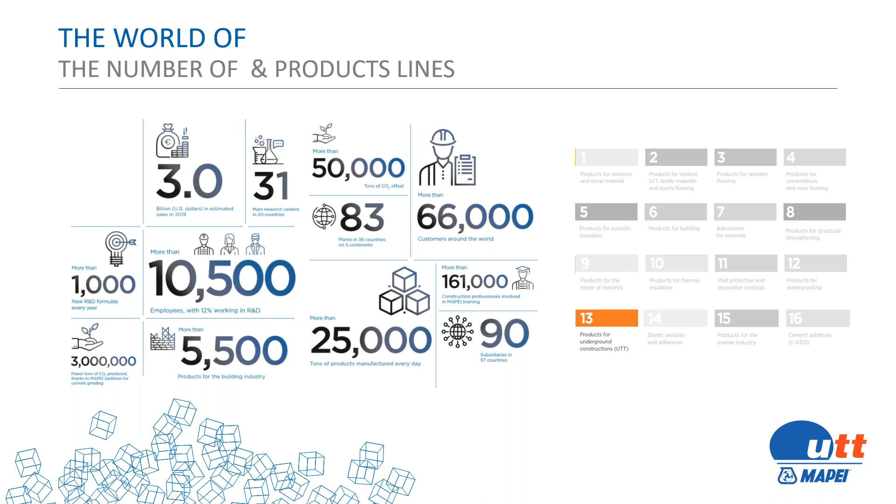This is why in Mapei we're going to find we have working through different segments. Today we are with UTT. So UTT, it's a team responsible about underground structure product. Our area of focus is tunneling, underground construction, and mining. And we serve our customer in different product groups.

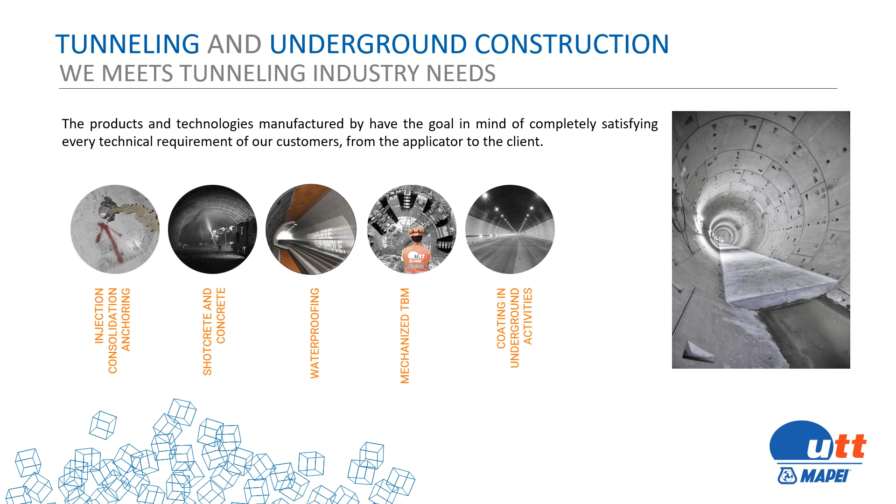So we have a very great solution on injection and soil injection as well, shotcrete, waterproofing, TBM product, coating and protection, and also rehabilitation. When we talk about spray concrete or shotcrete, we can provide admixture, accelerator, additive to improve the concrete. Also, we have TBM products like soil conditioning, grouting, sealant.

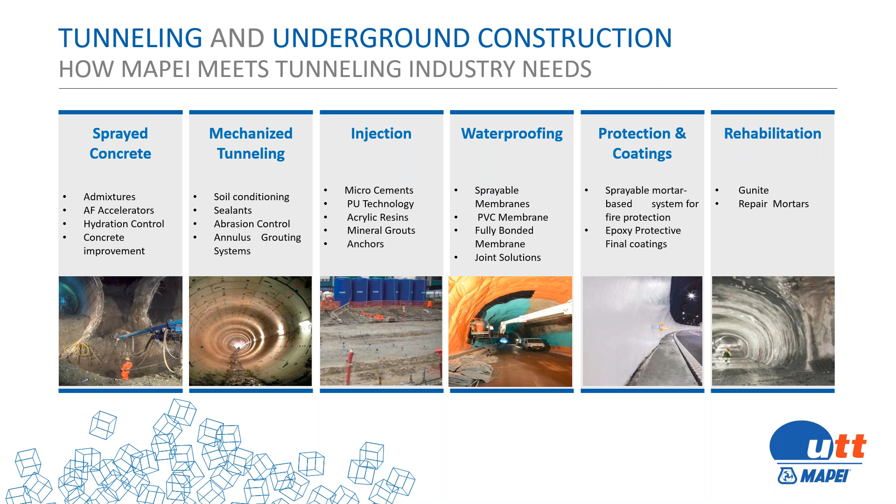In injection, we have different types of injection technology as we're going to see today. So we have microfine cement, PU technology, acrylic, silicate. Waterproofing, we also have different types of solutions, protection and coating and rehabilitation. Mapei, we provide our customer with innovation, technical support. We have a great experienced team and fantastic logistics and supply.

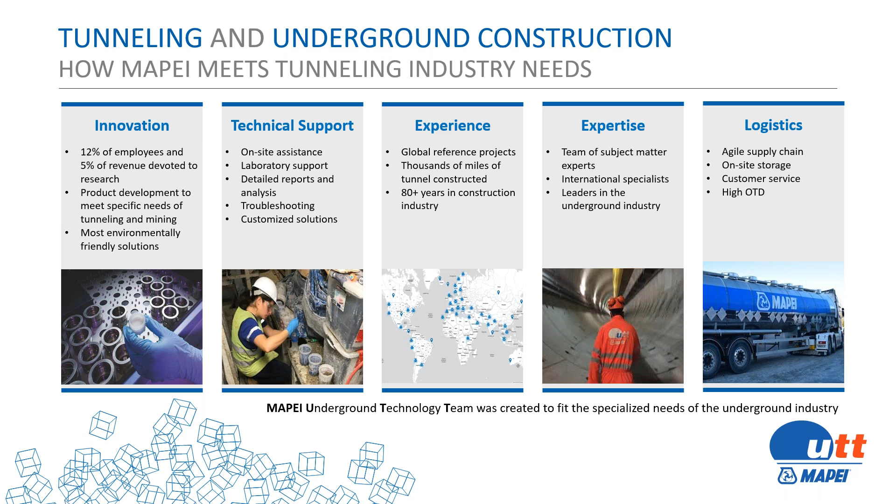Before we start with waterproofing, I would like to give a very quick introduction about our team here in North America. So in front of you, you will find different types of experts in different fields, supporting with a worldwide support team from Mapei UTT, and also we have our administrative team giving us very, very great support.

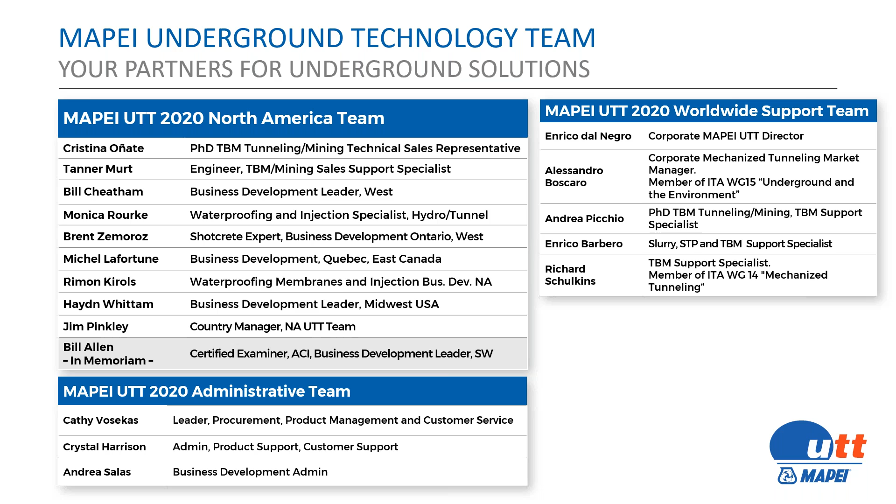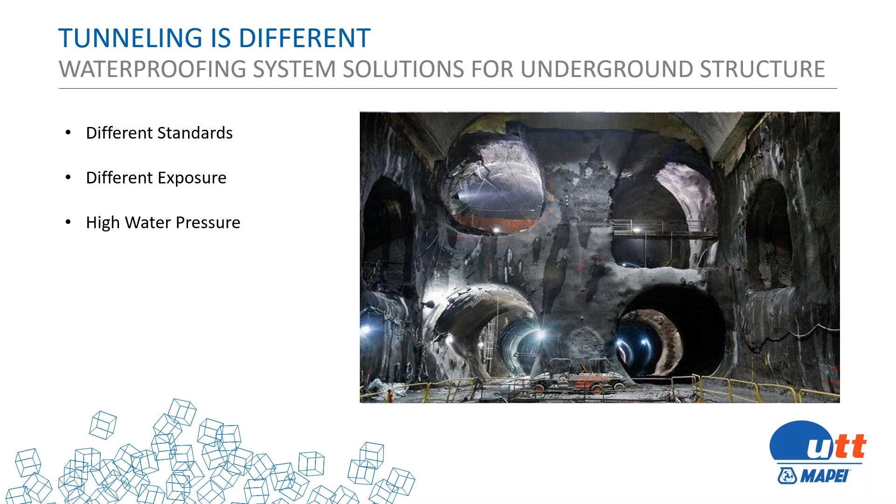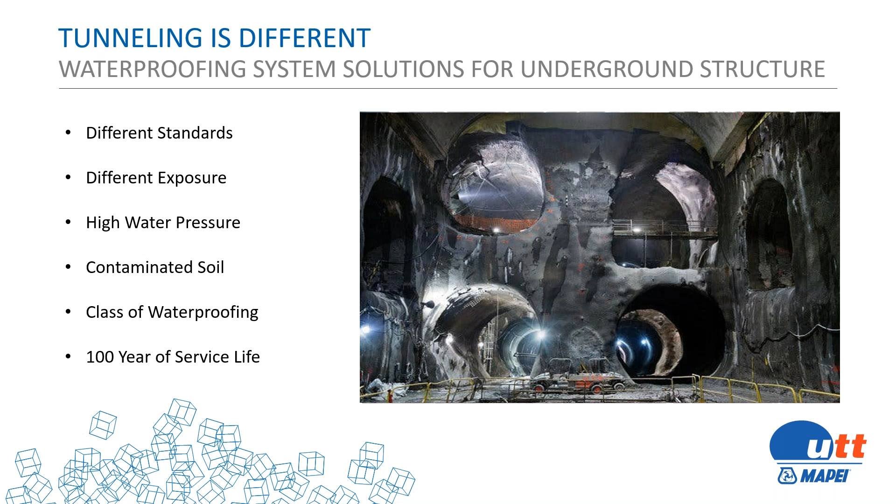This is why tunneling needs a different standard. So we speak about different standards comparing with residential and commercial. Also in tunneling life, we have different types of exposure and different types of force we need to handle. Most tunnel projects are subject to very, very high water pressure. Soil is contaminated with sulfate and chloride. The owner of waterproofing needs a very, very high class of waterproofing. And also the owner has a very, very specific requirement about 100-year service life. So he's asking for a waterproofing material that can have a life of 100 years of service life. This is why, as you can see, we have different challenges when it comes to waterproofing.

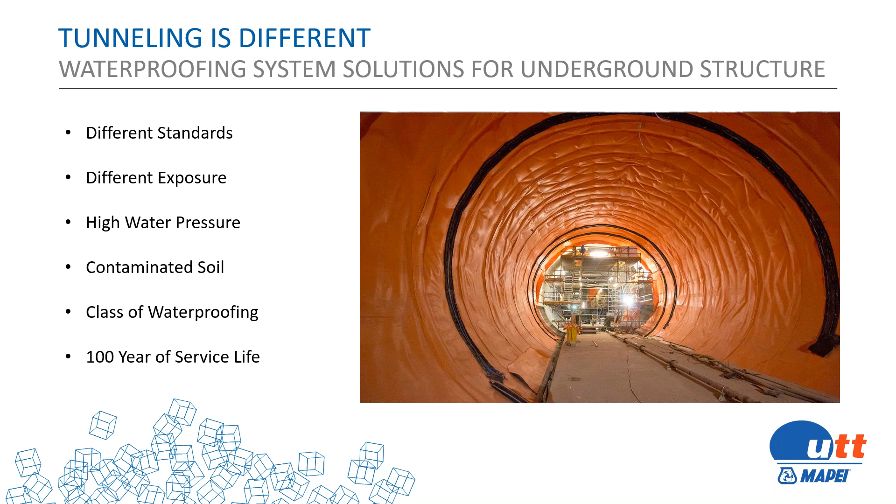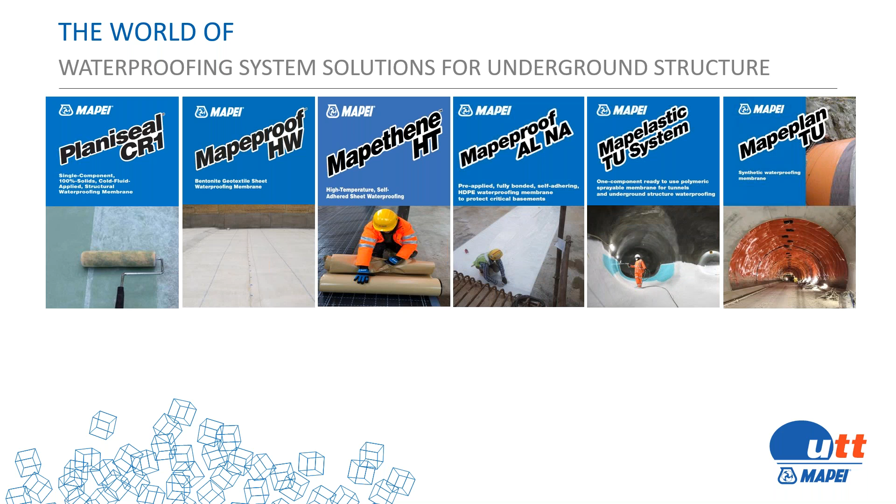In Mapei, we have different types of solutions when it comes to waterproofing. We have the Planiseal CR1, a single component cold fluid applied membrane. We have the Mapeproof HW bentonite waterproofing membrane. We have Mapethene HT, the peel and stick fully bonded membrane. We have Mapeproof AL NA pre-applied fully bonded membrane. And also we have Mapelastic TU system and Mapeplan TU.

Underground or deep underground structures in tunneling are different from residential and commercial construction. So most of the time in tunneling, we focus on the last two systems, either Mapelastic TU system or Mapeplan TU. Today we're going to cover a quick overview of these two systems, starting with Mapelastic TU system.

Mapelastic is a one component, ready to use, polymeric sprayable membrane especially designed for tunnel and underground structural waterproofing. The membrane will be fully bonded from both sides. First we have the shotcrete surface, we spray the membrane over the shotcrete, and then we have the final lining.

The membrane will be bonded to both the shotcrete substrate and the final lining concrete. The material comes in double color, white and green, which helps the applicator control the consumption of application. It also has a very high bond strength of 1 megapascal. It's a highly flexible material with crack bridging capability, high resistance to water pressure, and very good fire resistance.

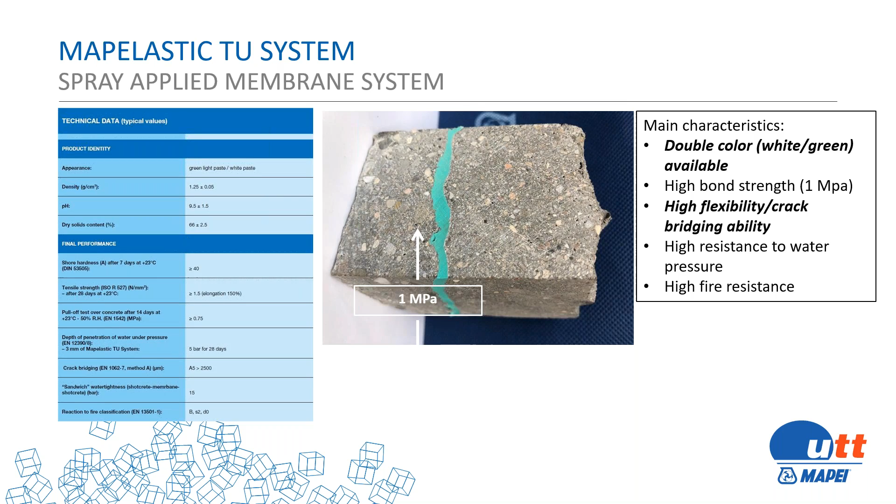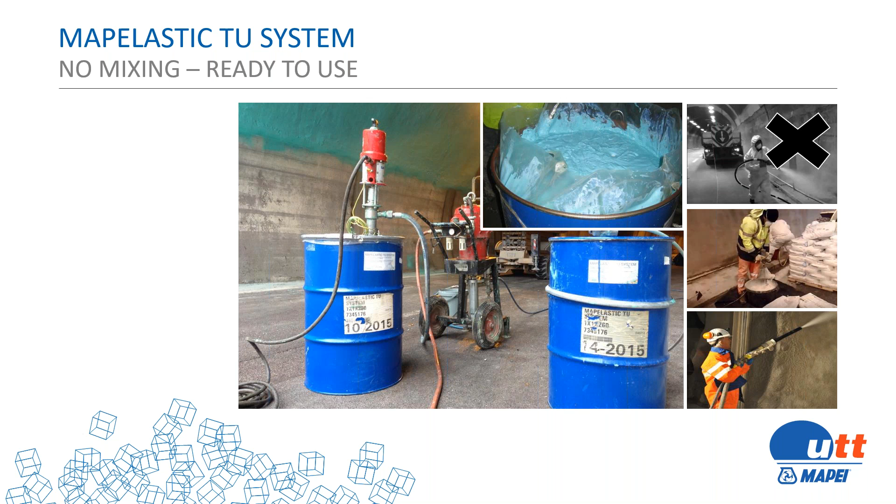Our system has a lot of advantages. First of all, no mixing - it's a ready-to-use product. Material goes to the site, we connect to the pump, and we start spraying. So there's no mixing, avoiding any type of mixing mistake. It's light and uses user-friendly equipment, so we don't need very heavy equipment inside the tunnel. It's very easy to handle.

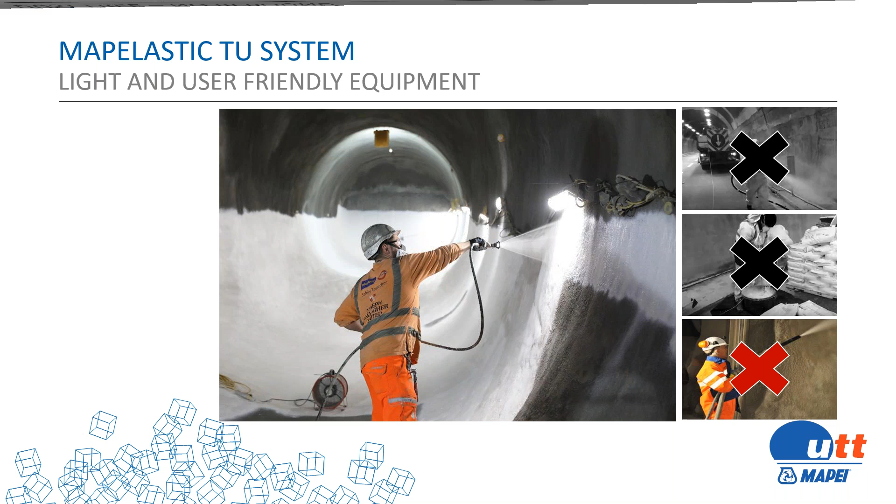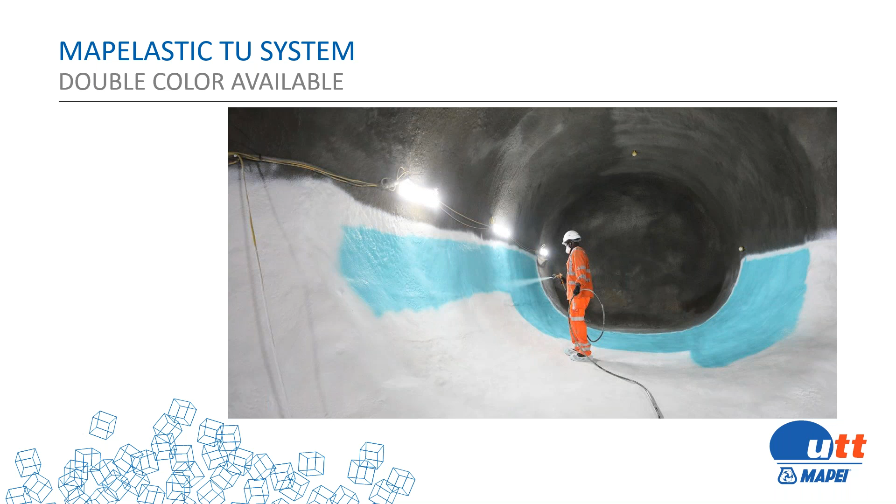And also no rebound - material is very easy to apply. The most important thing, especially when it comes to consumption, is the double color material. So as we can see, we spray first the white color, and now we're starting with the green color.

Surface preparation, when we speak about spray applied membrane, is a very important parameter. There are many different ways to handle and manage water infiltration inside the tunnel to reach a very good substrate before we start applying the sprayable membrane. To reach this good substrate, we first need to handle any type of water infiltration. We can use a drainage board before shotcreting, and once we have shotcrete, we have a good surface so we can spray the membrane.

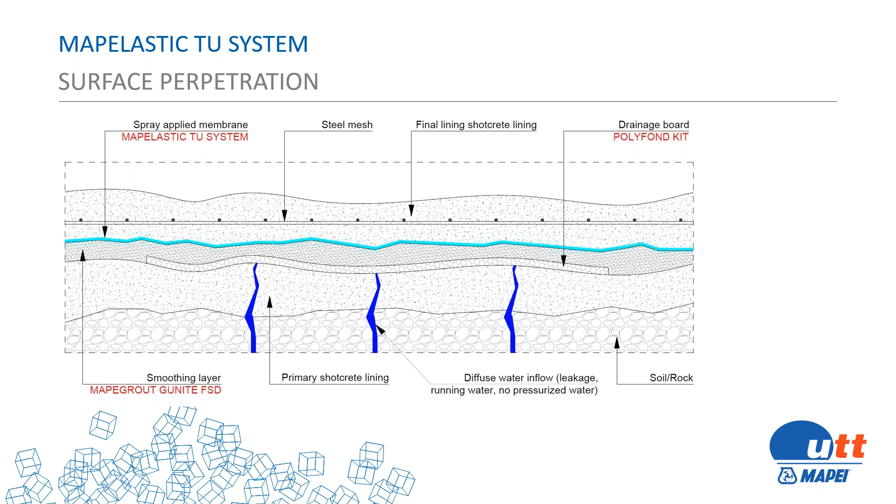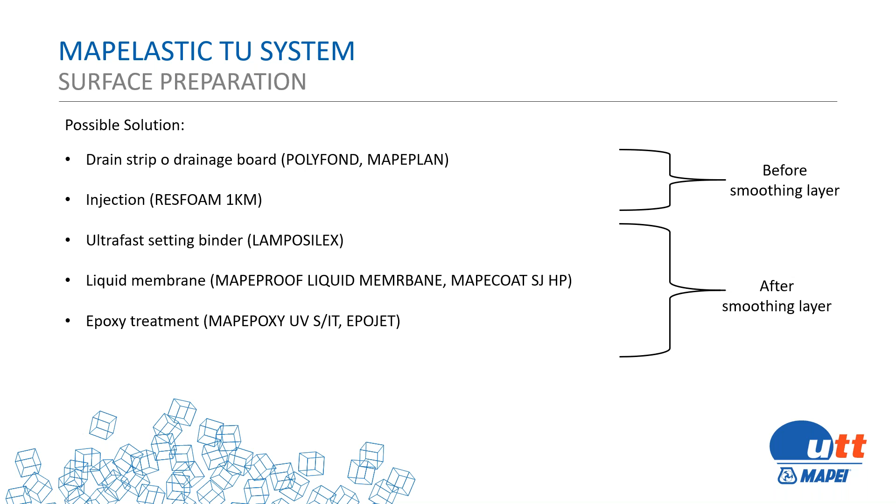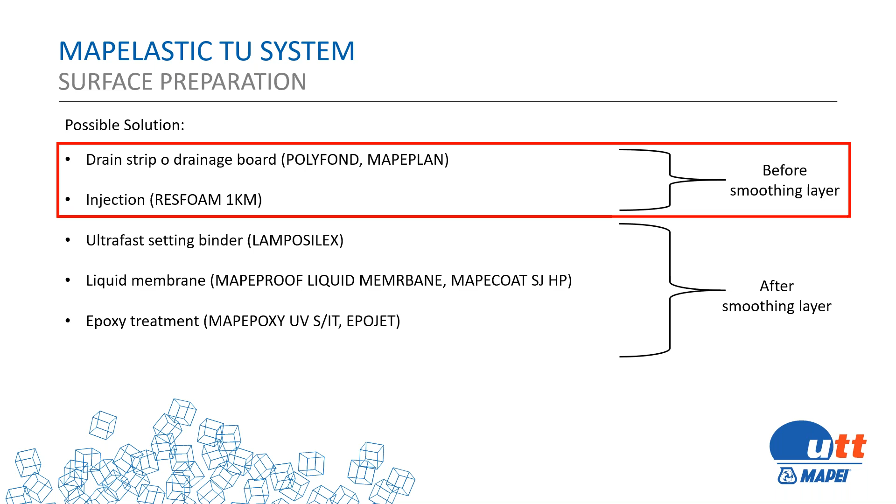At Mapei, we have a different way of reaching this type of substrate preparation. We divide it into two groups: first, before the smoothing layer or before shotcrete, we can use a drainage strip, drainage board, or injection. Or if shotcrete is done and we start to see water coming through, we have a different method and solution using epoxy treatment, liquid applied membrane, or ultra fast setting binder to solve this issue.

The second system we're going to cover today, we call Mapeplan TU S WL. It is a synthetic waterproofing membrane, usually used for tunnel and underground deep structures.

PVC membrane is one of the most famous waterproofing systems when it comes to tunnels. What makes PVC famous is that it has a lot of very good characteristics, like high mechanical resistance, high resistance to permanent water pressure, high resistance to root action, high flexibility at low temperature, high resistance to stray current, explosion resistance, and high resistance to aging. Besides these important characteristics, PVC membrane has high durability.

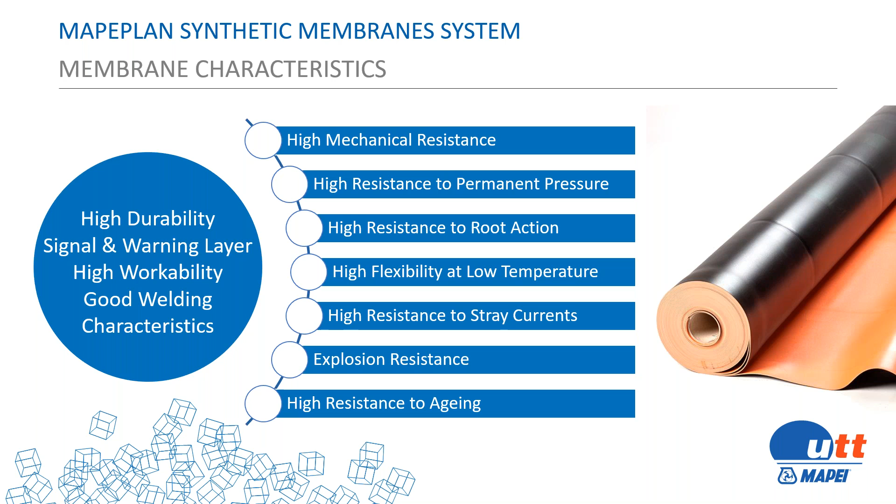As we can see, the membrane comes in twin color, with what is called a signal and warning layer. It has high workability, good weldability, and as we'll see later, we can have full quality control before pouring the concrete.

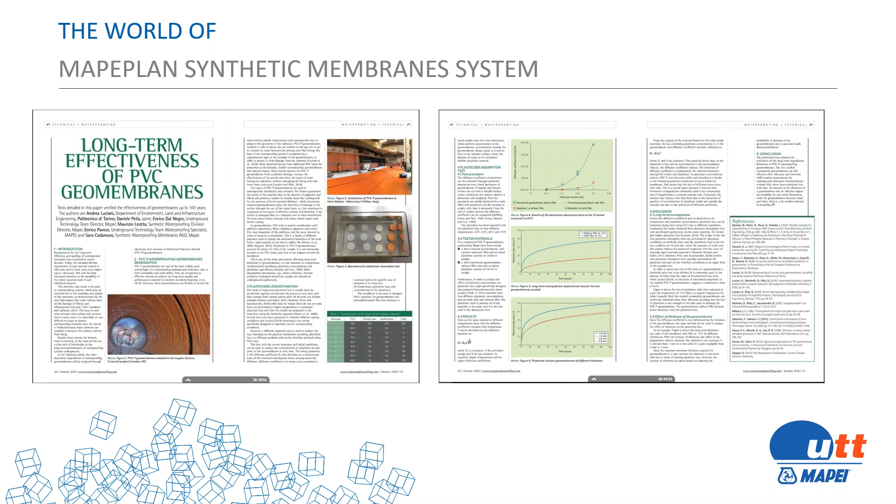We did different types of tests to confirm the long-term effectiveness of PVC membrane, and this is available. So we have our system approved for 100 years of service life, as required by owners.

As I mentioned, we have two versions of the membrane. We have a membrane with what is called the signal layer - the orange color layer - which is 0.4 mm nominal thickness. And we also have a membrane with what is called the warning layer, which is a thinner signal layer meeting the German standard, less than 0.2 mm nominal thickness.

The advantage of this signal and warning layer is that after applying the membrane inside the tunnel, if any damage happens to the membrane, the signal layer or warning layer will be scratched and we'll see the black color underneath. This gives us a good indication that there's an issue needing attention or repair.

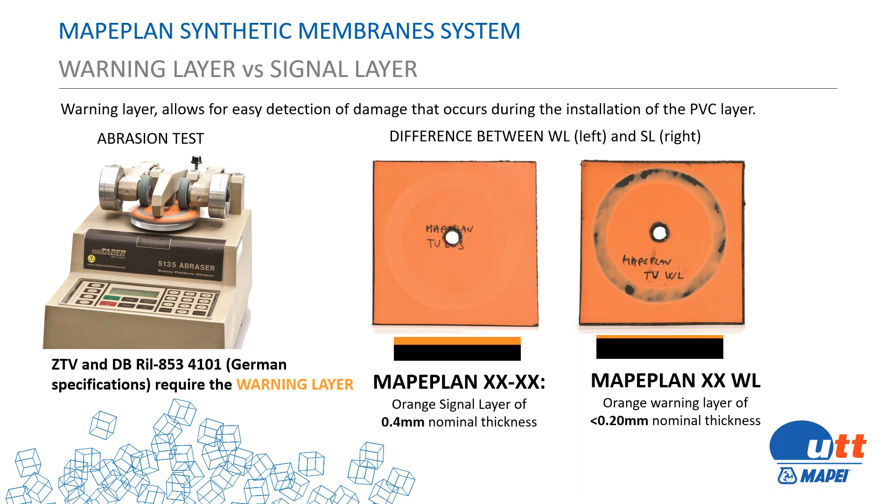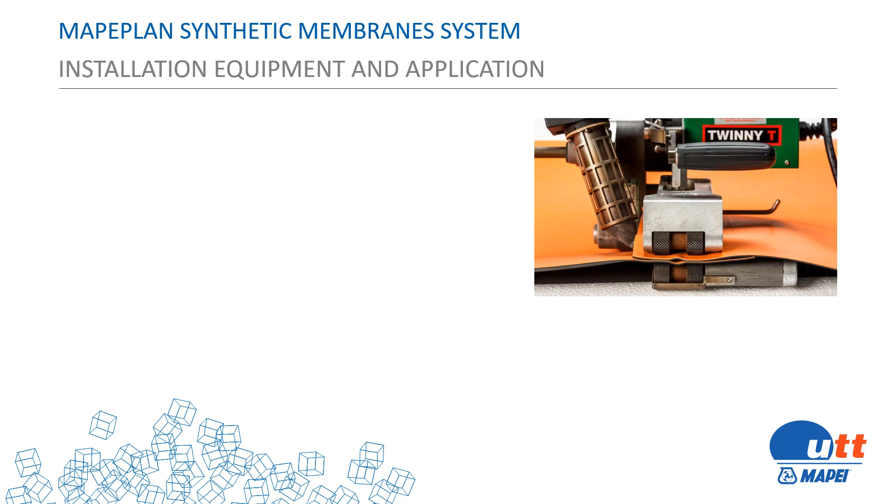As I mentioned, the most important part of the PVC system, or why it's recommended for tunnel construction, is the overlap, the welded overlap. We're using a hand welding machine to weld the overlap, or an automatic welding machine. The automatic welding machine can give us a single weld or a double weld. Most of the time, most standards ask for double welding overlap.

Double welding overlap means we have two seams, one on the right and one on the left, and in between we have an air channel, an open channel, which we use for testing purposes. After welding the overlap with the machine, we can test the joint using an air pressure test. If we close the beginning and end of the line, we will have this closed channel where we can introduce the air pressure needle.

We make a pressure of 2 bar, and then we start to monitor the gauge. If the gauge goes down, that means we have an issue with the overlap. If the gauge doesn't go down, that means we have a very, very good overlap. Again, the welded overlap is stronger than the membrane itself.

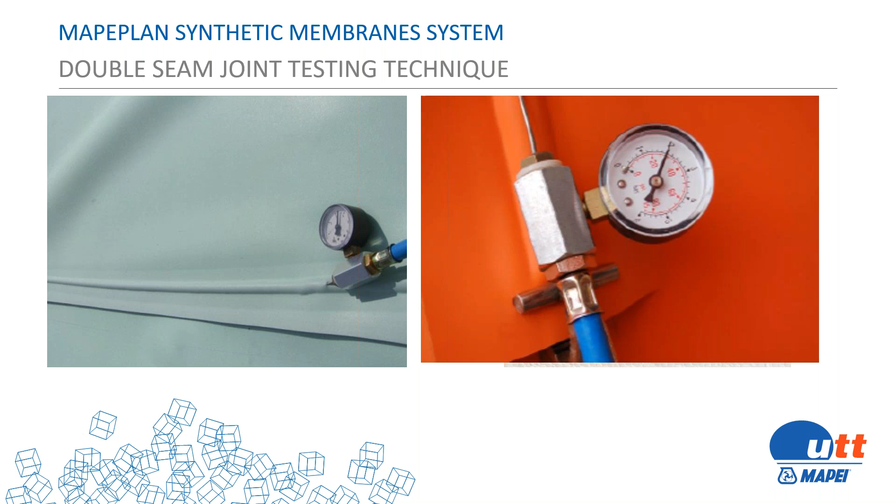As I mentioned, the beauty of the system is quality control before pouring the concrete. So after installing the waterproofing membrane, or PVC membrane, we can have full quality control before pouring the concrete, through the air pressure test, and also other methods of testing.

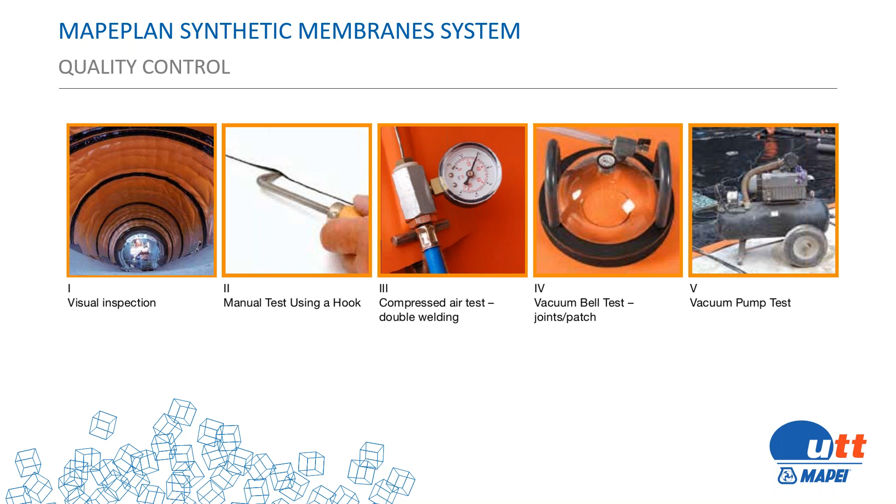As we're going to see here, we have what's called visual inspection, manual testing using a special tool or special hook. We have the compressed air test, air pressure test. We can also use a vacuum bell, or a pinhole detector test, called a spark test.

This brush will go on top of the membrane. Once we find the pinhole, we get an alert, both sound and visual, telling us we have an issue. So as we see now, we have a very, very high quality product, welded, with full quality control before pouring the concrete.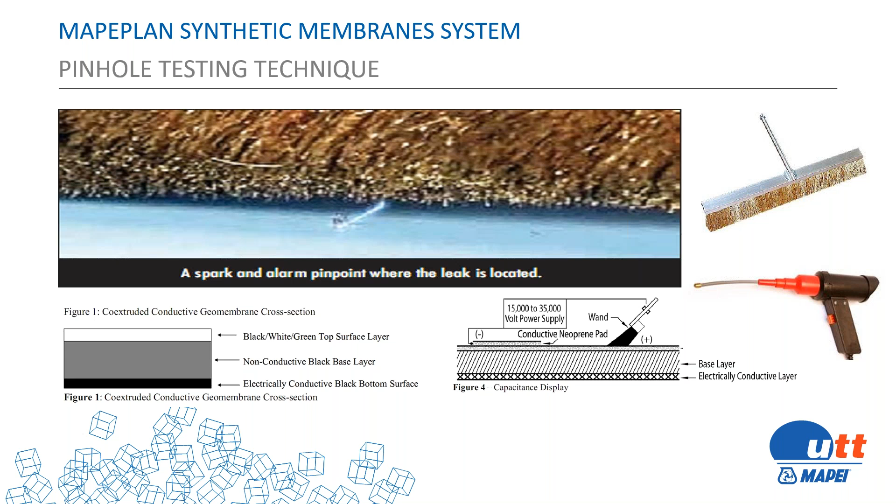Another big beauty of the system is what we call the compartment system. The PVC membrane system uses a water stop as part of the combined system. We use water stop at all construction joints and expansion joints to seal the joint, and we weld this water stop to the membrane to create what we call a compartment.

Each compartment is around 1,500 square feet of area. Every compartment will have a testing and injection flange. We use this flange for testing the waterproofing system after pouring concrete, and also in case of any damage or leakage, we can repair the system.

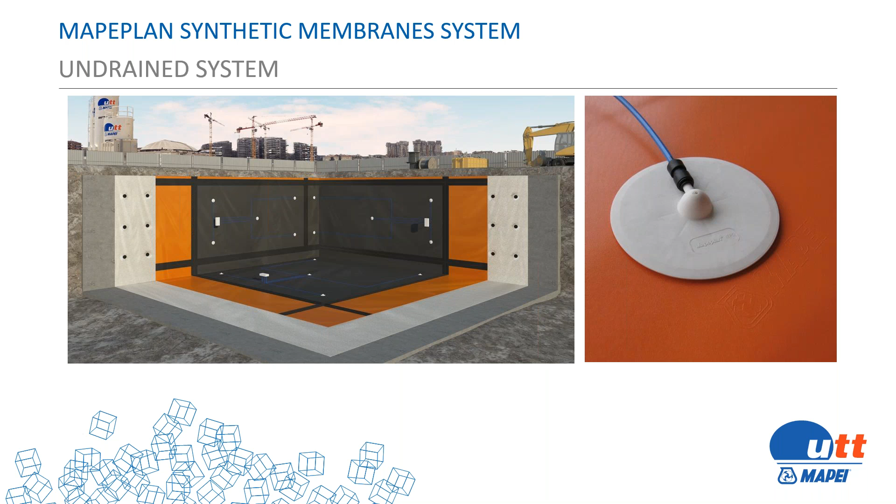As we see now, this compartment has 5 valves. This valve connects through the blue hose to a junction box. In case of any damage, water will start to show from this valve. This is why we call it a testing valve.

Very easy - once we start to see water dropping from this hose, we connect our injection pump and inject the acrylic gel material through the junction box. This way we start to fill the compartment and repair the leakage from the source. This valve gives us very good access to the source of the leakage.

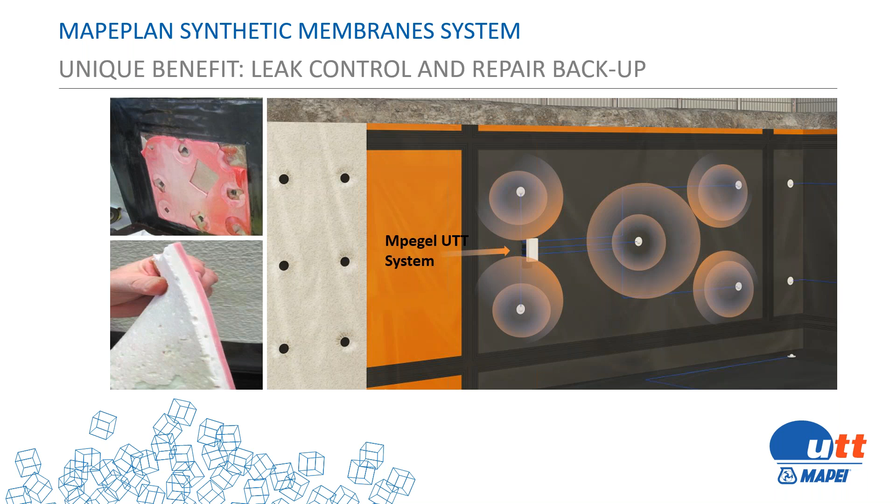At Mapei, we have a very big advantage in having both systems - the sprayable membrane and the PVC sheet membrane. This helps us a lot in many projects, because sometimes a project combines two different types of system. As Mapei, we're also able to provide a transition detail between these two systems, between the PVC system and the sprayable membrane system.

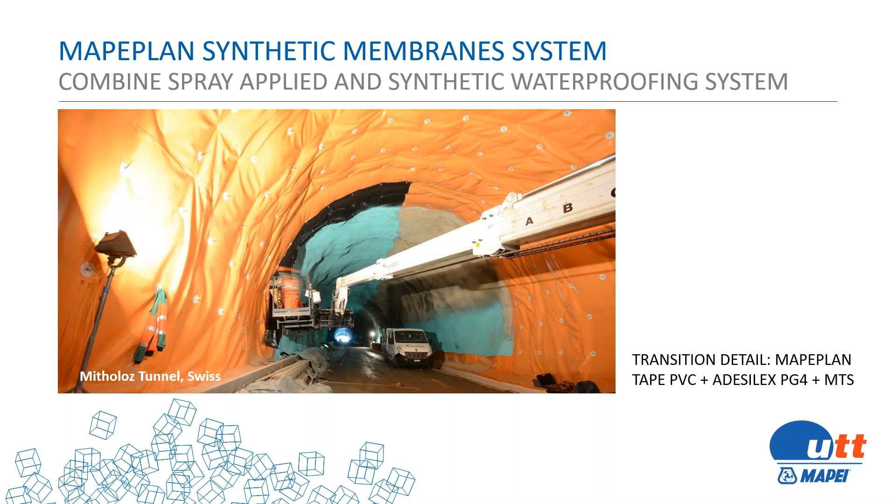In front of us now we have a very good photo from our project in Switzerland. It's a tunnel, so we can see the built-up section of the system. First of all we have the shotcrete. Above the shotcrete we start to lay the geotextile. Then we have the PVC membrane. On top of the PVC membrane, we can see the water stop welded.

This water stop is in the area where we have a construction joint, and at the same time, this water stop creates the compartment, so we can see the different compartments. We also see on the right the blue hose for the injection flange, which we use for testing and in case of any leakage. We also see that the water stop is backed up with an injection hose solution.

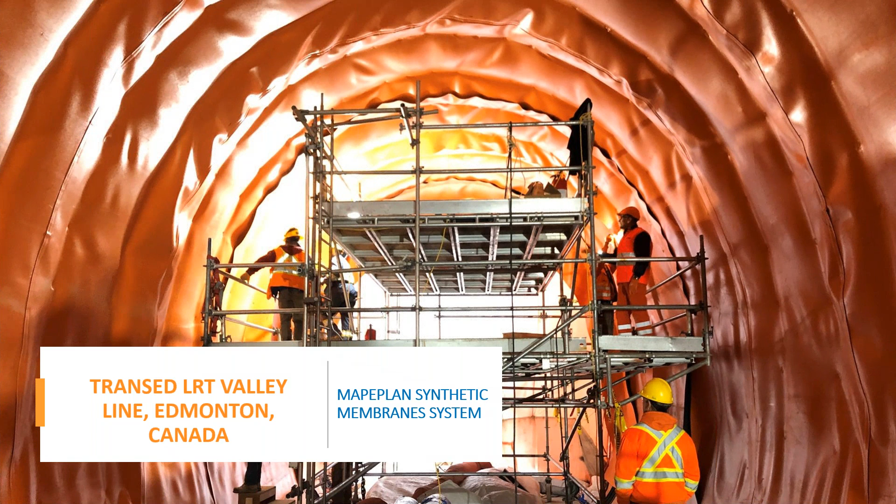In this same project, here's another photo showing people applying membrane to the arch of the tunnel. We start by fixing the membrane using a fixing disc to the substrate. We see the overlap, and also people start testing this overlap using an air pressure test.

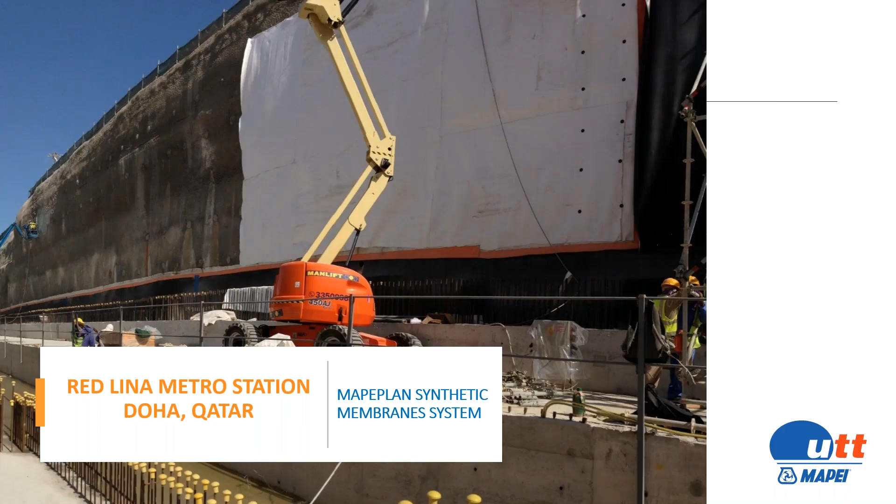Another station example. Here the applicator is easily installing the PVC membrane on the shotcrete surface. After installing the membrane, they start welding the water stop to the membrane for creating the compartment.

PVC membrane is also used a lot in cut and cover tunnels. So if we have a tunnel starting as a mining tunnel, and then we have a part that is cut and cover, the PVC membrane has a very good advantage: it can be pre-applied or post-applied. So even if the construction is already done and we have concrete, we can post-apply the membrane over the concrete surface.

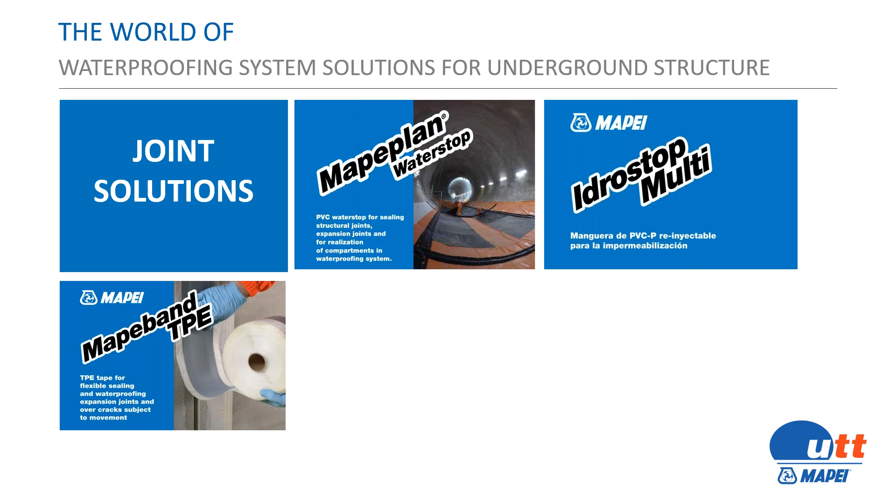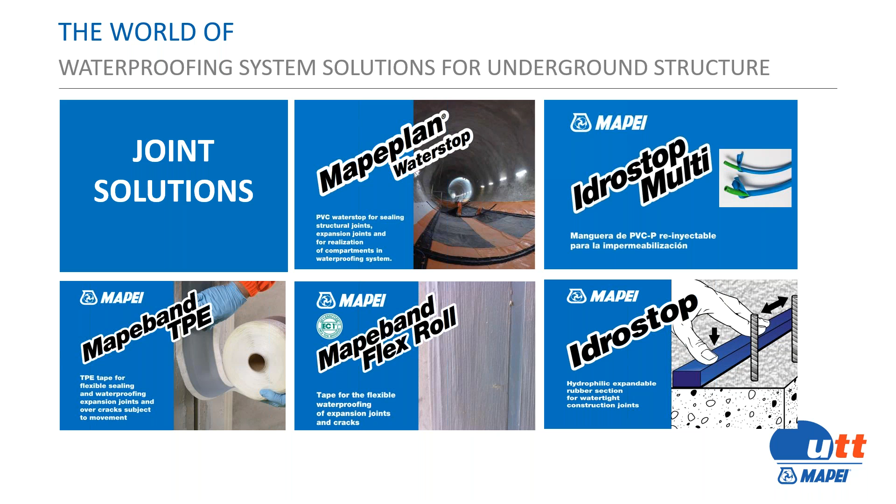Mapei supplies not only waterproofing, but as I mentioned, it is a full system. So we supply all joint solutions available. The system includes Mapeplan Waterstop, a PVC water stop, Idrostop Multi which is the injection hose, Mapeband TPE which is a bonded tape, Idrostop the swelling gasket, and also the Mapeband Flex Roll. So we have a lot of different types of injection and joint solutions we use. We've finished the waterproofing part, and now I will give the floor to Monica to start with our Mapei injection solution. The floor is yours, Monica.

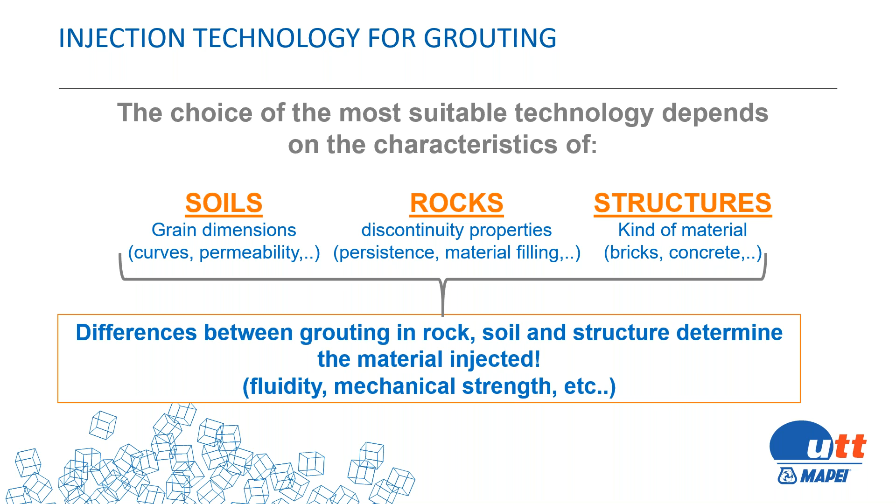Injection technology for grouting. The choice of your grout will depend on these categories: the soils, the rocks, the structures, and that will decide for us the selection of the proper grout material needed. Next slide.

Pre-injection grouting. The idea of pre-injection grouting is to treat the ground prior to excavation by injecting a grout. Particularly when we are doing TBMs, we suggest that pre-injection grouting will save a lot of money on post-injection grouting. The idea is to drill boreholes in front of the face of the TBM into the soil to reduce the permeability, meaning the water inflow, and improve the mechanical strength of the soil or rock mass. Post-injection would be grouting done afterwards.

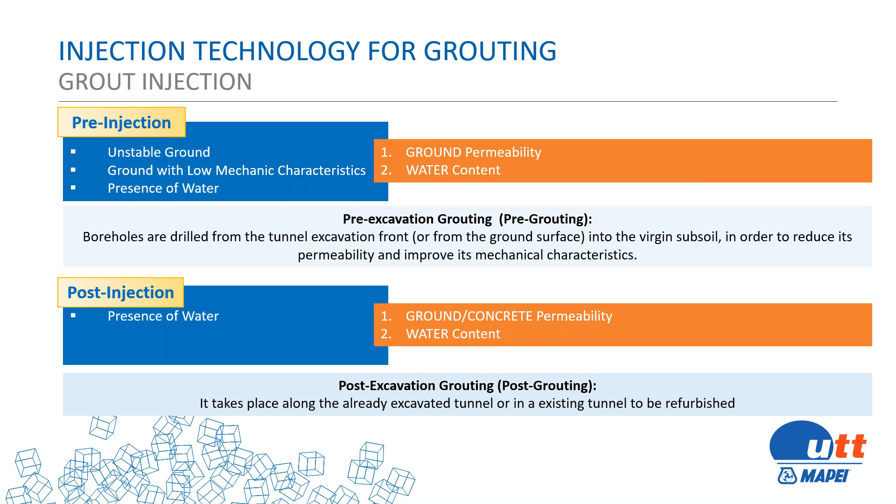Next slide. During pre-injection, the process of grouting consists of filling pores or cavities in the soil or rock with a liquid grout, and therefore we can decrease the permeability and improve the shear strength of the soil.

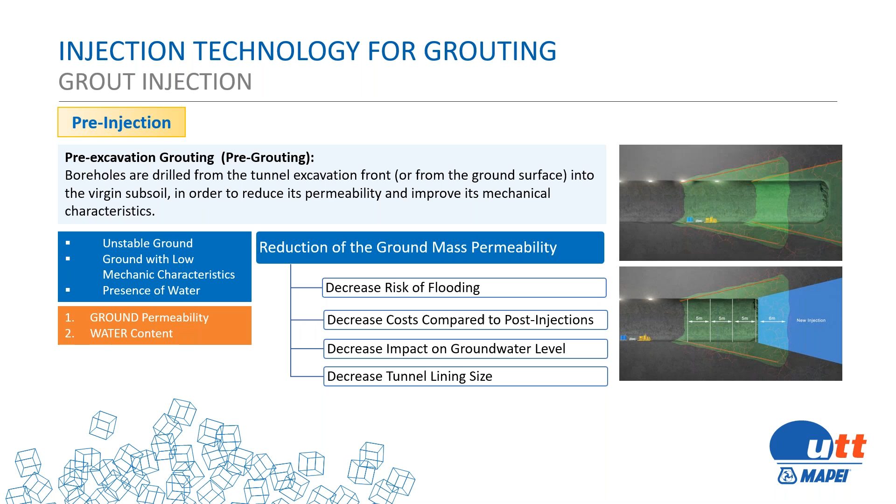In that case, we usually start with cements. That's what most contractors will start with on the low end. And in the picture on the right, you see that if the grain size is too big, it's not going to get to the area that you need.

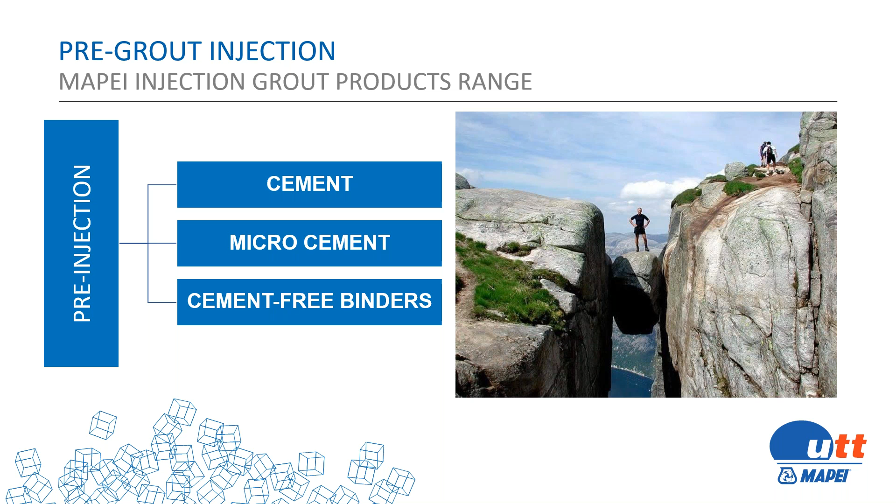So Mapei UTT offers microfine cements and cement-free binders. When we look at the grain size and void diameters, if you look at this chart, on the very bottom we have our Mapejet system, which is a colloidal silica. Then our Microcem 12,000 is an ultrafine cement, and then our Microcem 8,000. So what you have are grain sizes - if you compare it in size to human hair, you can see that a strand of human hair compared to our microfine cement makes it very, very low viscosity with great pumpability.

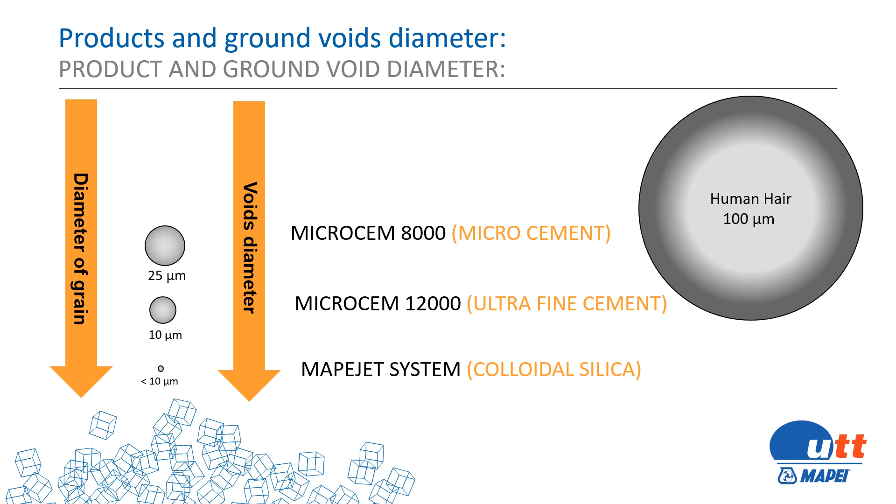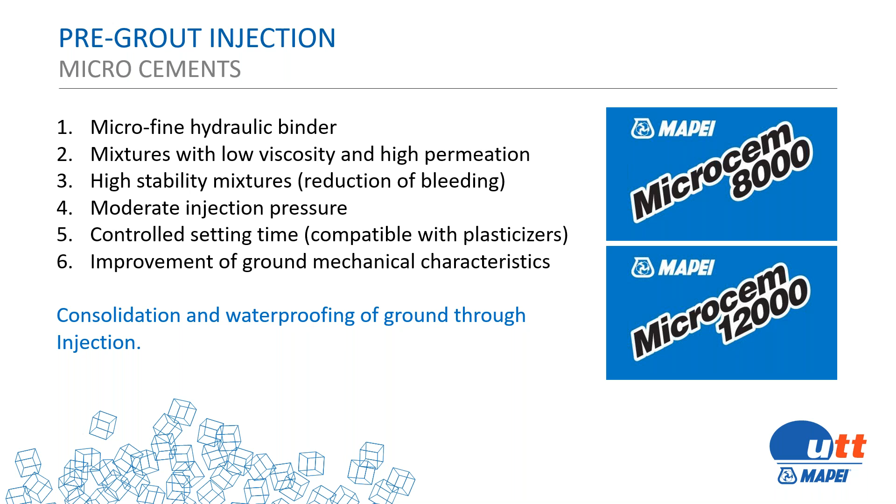Next slide. So those are our two products in our microfine category. We use them for consolidation and waterproofing of the ground through injection. Next slide.

We also have a product, the colloidal silicas, which you don't hear about very often. Mapei UTT has this great product that's basically a low viscosity chemical grout that can be injected to form an impermeable barrier in the ground. What we like about it is it's a good alternative to cementitious grouts, which sometimes cannot be pumped under pressure. It's also a low pH grout that can penetrate into very, very small areas, and it's more commercially viable than using an acrylic grout.

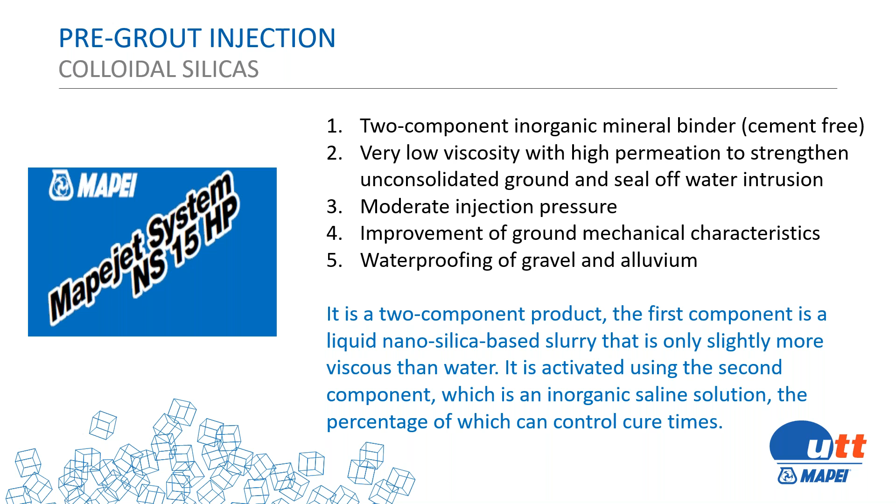We make the Mapejet system NS right here in America. With this division of the Mapejet system, we have one that takes about 3 hours to cure, so it can permeate the matrix of the soil. We also have the availability of decreasing the reaction time down to even seconds. So the idea is that we have this low viscosity material, and in this slide you can see how under pressure it can permeate through even fine sandy dolomite soil and create a very, very solid matrix.

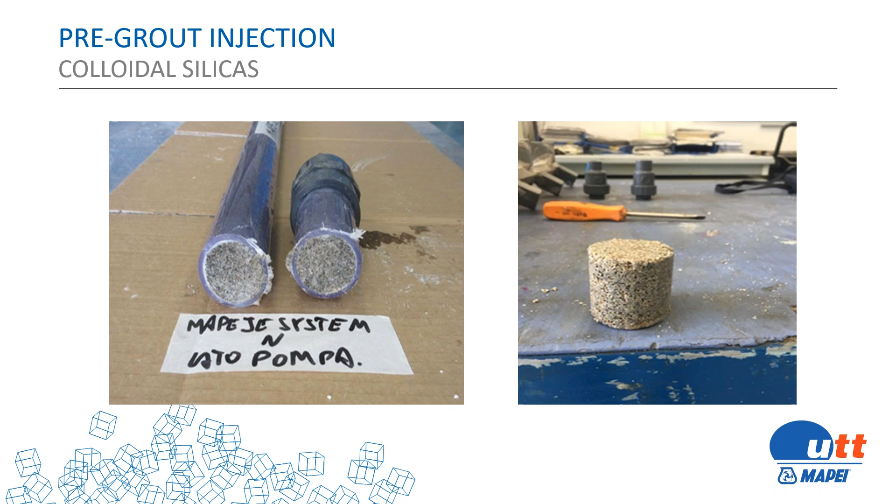We also have admixtures in the UTT lineup. The Mapegrout Compact is an anti-washout. One reason I'm showing this material, even though we have plasticizers and superplasticizers, is we actually use it quite a bit when we have the influx of groundwater. Groundwater is the most difficult problem during excavation work underground because the water increases the pore water pressure and decreases the shear strength. By adding an anti-washout, it increases the cohesion, so adding the anti-washout prevents washout of the fines in the cement. Where the admixture is used, the water cement ratio becomes basically the water binder ratio. We're very lucky to have these materials.

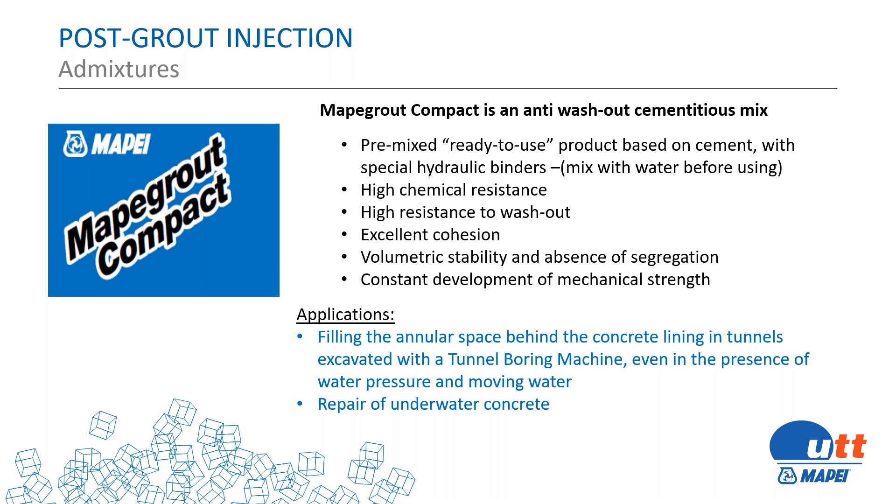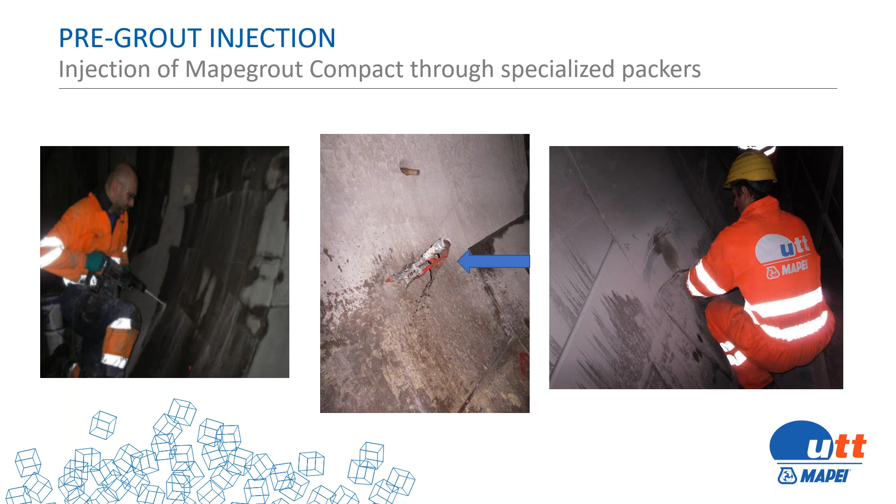We know at Mapei we have admixtures, but the ones used in our category underground are designed specifically for this type of injection. The middle picture is the packer, similar to packers used for normal grout injection. This is a typical packer, and this is a picture of the Mapegrout being injected behind the segments in a tunnel.

Now for the post-grout injections. This is our family of post-grout injection materials. We have epoxies, urethanes, Resfoam, and Foamjet families, and we also have the silicas and the acrylics.

So here we have a chart that tells you which one you can use. We also have a brochure which covers this more in depth. When the customer or a specific situation occurs, we have a chart we can choose from, covering characteristics, properties, advantages and disadvantages of using one material over another.

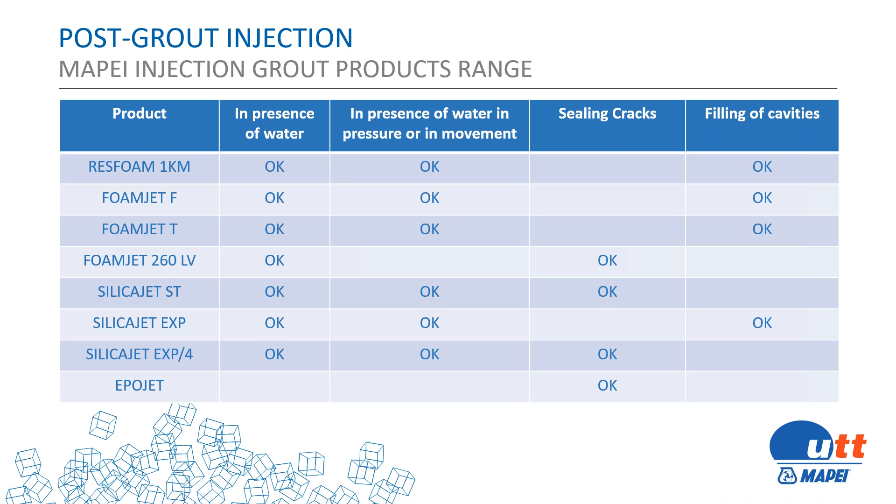So we have the Resfoam family and the Foamjet family. The Resfoam, we have Resfoam 1KM, a one component urethane. It's hydrophobic, has a quite fast reaction, and a tight cell structure. We use it quite a bit because it's easier for mobility in terms of using an airless spray pump.

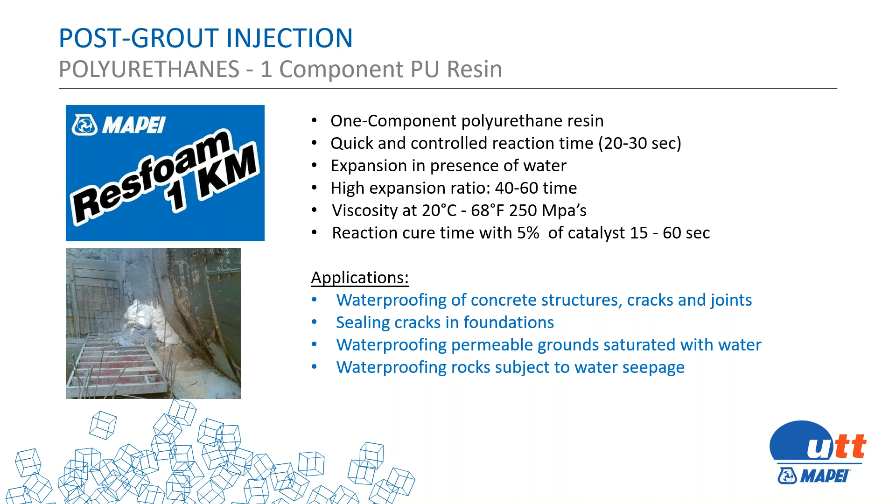We also have the other Resfoams within Mapei: the 45, which is hydrophobic, the 35, which is hydrophilic, and our SS75. They're all NSF approved, so many times underground, where we have requirements for NSF material, we have the viability of using those. We keep this one component urethane, we use it quite a bit, and it's also made right here in America.

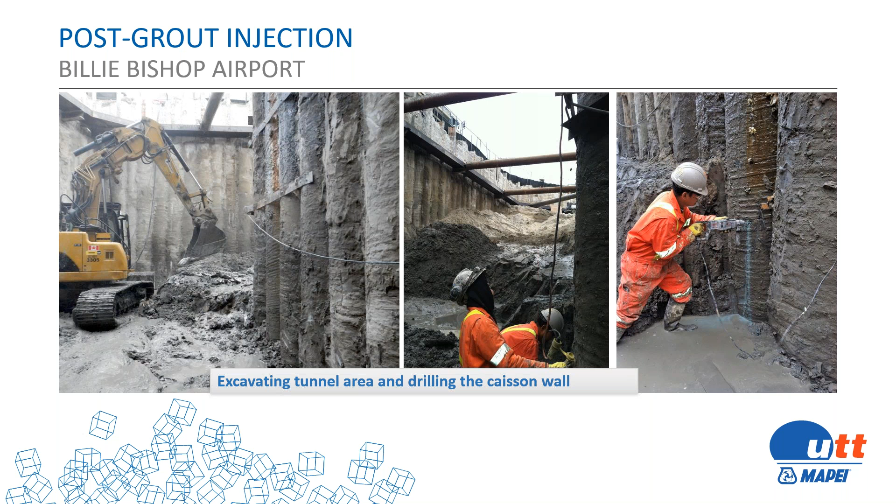Here's a picture of us using the Resfoam 1KM. These are caissons at the Billie Bishop Airport, right outside of Toronto. Here they are drilling into the caissons, and you can see where the injection ports are. This particular job was injected previously and had residual leakage, so we were able to incorporate the Resfoam 1KM and do a second injection without mechanically removing the first injection, stopping all the water.

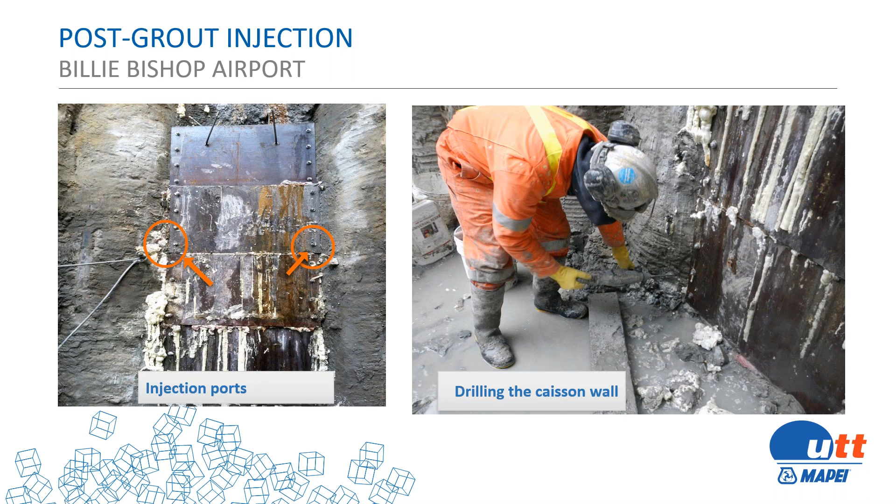The Foamjet family consists of two-component polyurethane resins. When I say two-component polyurethane, I'm not talking about what comes in the package, I'm talking about how it's going to be pumped. It's pumped with a two-component pump, component A and component B. You can also accelerate the material to make it go faster. What we like about using two-component materials, especially underground, is there's no travel time by putting a catalyst in a one component, which still has to travel through the injection hose.

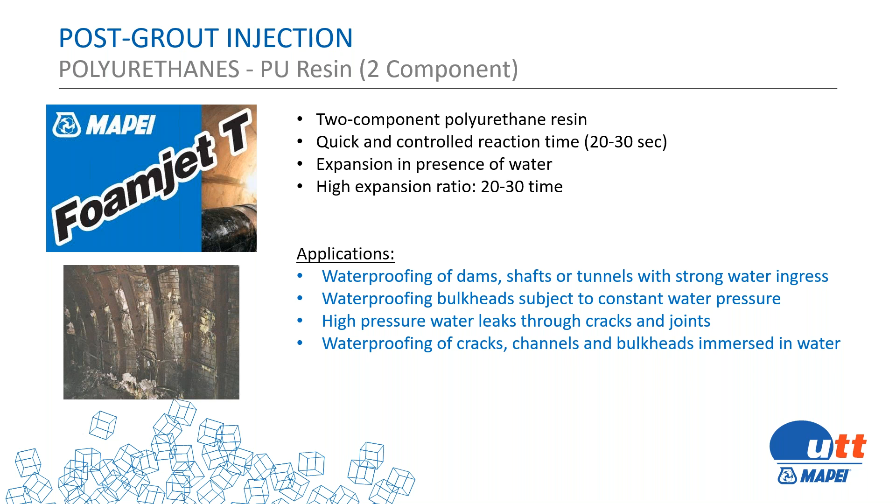These kind of structures, wherever you drill, geysers of water shoot up. And that is why you want to use a two-component material, because it gives you a quicker cure time, much faster, and it's a stronger material in just about a minute.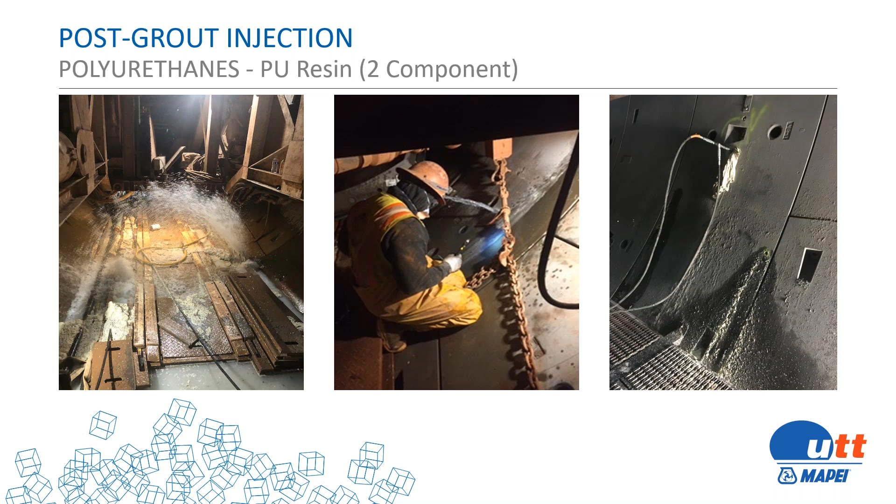We also use, on the right-hand side, observation ports. So where you show the injection at one point, you always use an observation port. It's open, it lets you know where that material is traveling and that you have communication between your injection points, because you know that you've filled the area behind the segment.

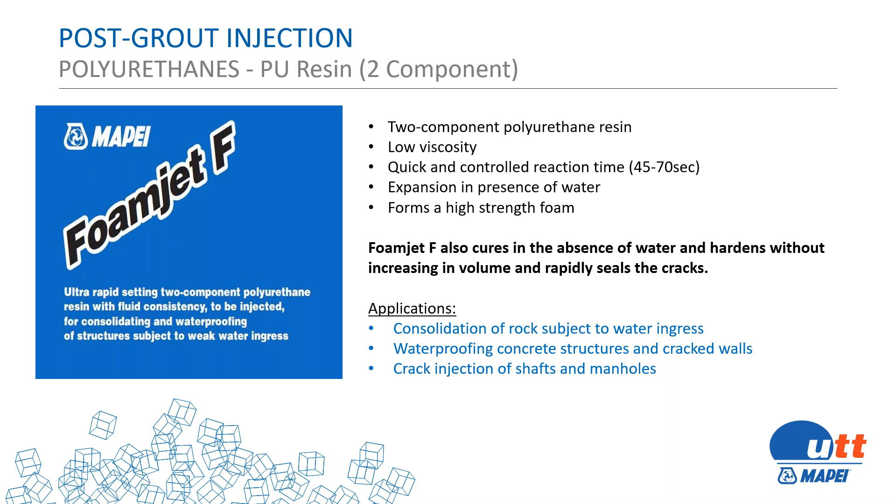We have in our family Foamjet F. This is another two-component material. This is a great product because it can cure in the absence of water and hardens without increasing the volume. So therefore, you can have it as a foam, a very strong foam, but it also will cure whether there's water or not. And we know with our urethanes that basically water is the catalyst. So with this special chemistry, the material can cure in the absence of water. It's used quite a bit in the consolidation of rocks and waterproofing structures and a lot of cracked walls where you need a little bit of elasticity.

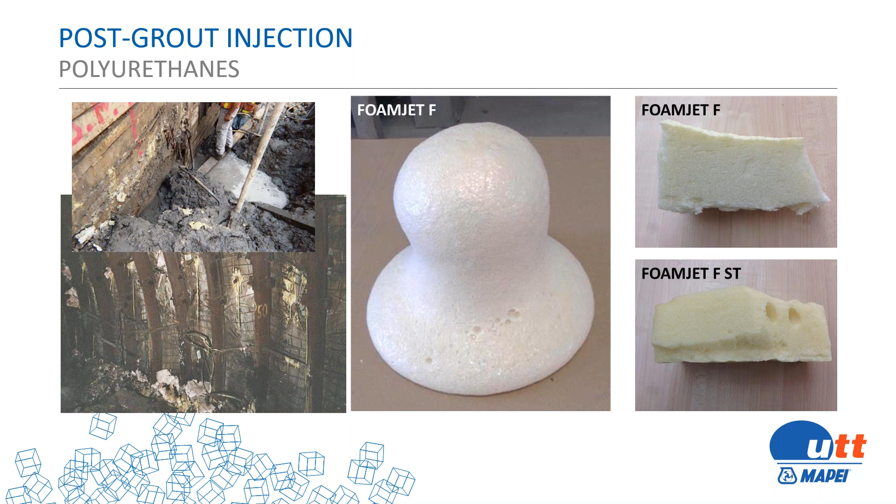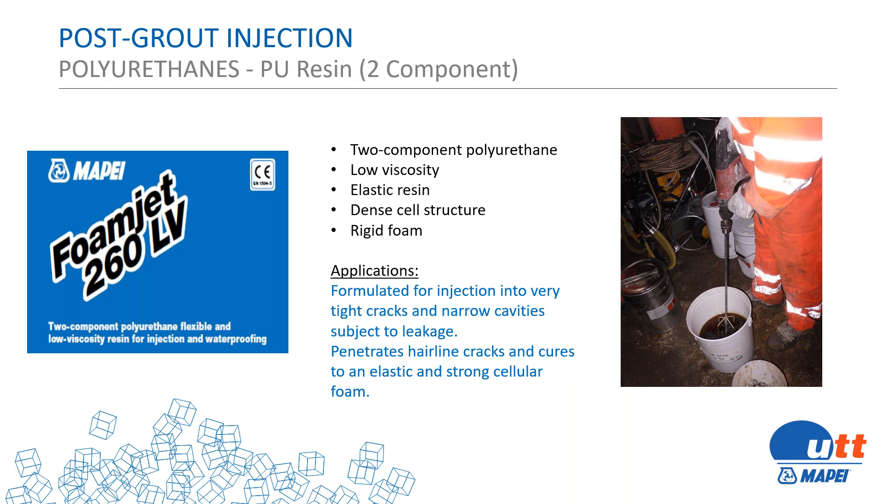We also have Foamjet 260 LV. The LV stands for low viscosity. This is an elastic resin, it has a very dense cell structure. So if sometimes a urethane can have a very high viscosity and you want to get it into a very fine crack, this material you would use for that. You can use it on hairline cracks. Again, it's a two-component material, and it also has a very strong cellular foam once it's cured.

So you could use it, for instance, this is a manhole. So you have the options of selecting a material. Here you could use the two-component because you have fine cracks. You also know that you're going to have cracks that are subject to water and cracks that aren't maybe subject to a lot of water. So you have a selection of materials that you can use, and a lot of times that may be based on the access and mobilization. If you can't get a pump down there, but you can run a two-component pump and run the lines down there. So we give the customer the viability of some choice, still staying within the characteristics and properties of the grout material that's selected.

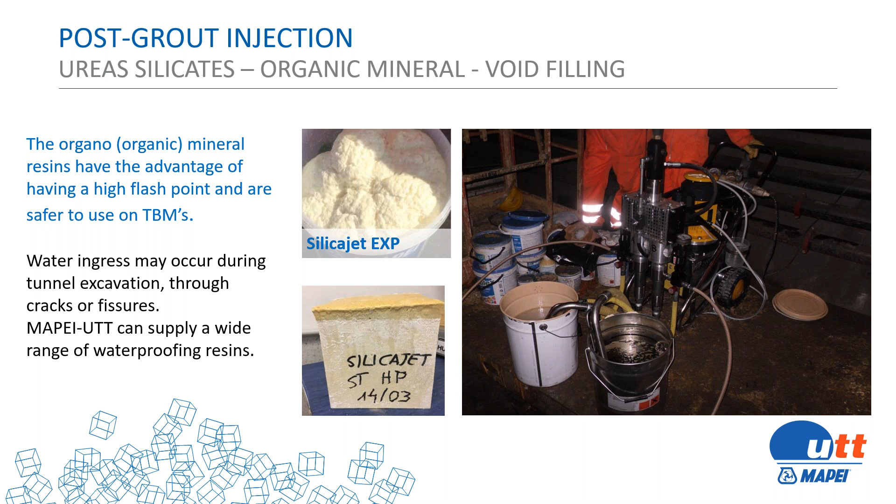We also have the silicates. The silicates are an organic mineral, and I would tell you that the silicates are probably the most used grouting material, with very many different derivatives. There's about 600 different kinds of silicates. In this case, we have what we call a urea silicate, urea coming from the polyurea family, which would be your polyurethanes, and then the silicates. So here we have materials that can foam, can glue, and can travel very easily. Again, two-component material, fast reaction.

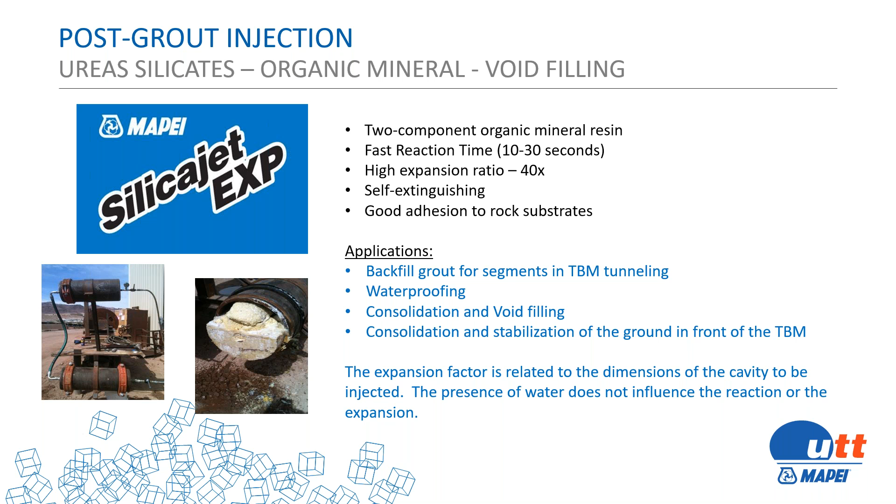Our Silicajet, again, like our other families, we have three different family members of our silicate family. This one is high expansion, 40 times. We use it a lot for backfilling in the tunnels when we're using TBMs. The expansion factor would be relative to the space it's filling.

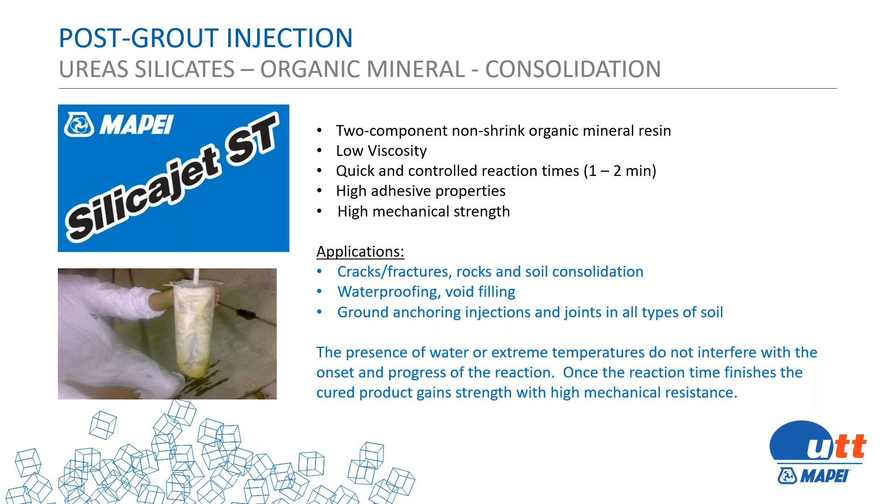Here we have the Silicajet ST, which has a very, very high mechanical strength and high adhesive properties. So again, it's targeted for cracks and fractures. Again, you can use it in rocks and soil. So it comes in the drums, and here we have soil where it can be used very successfully in gluing all this rock or soil together. And if there's water, it will cure up and stop the water.

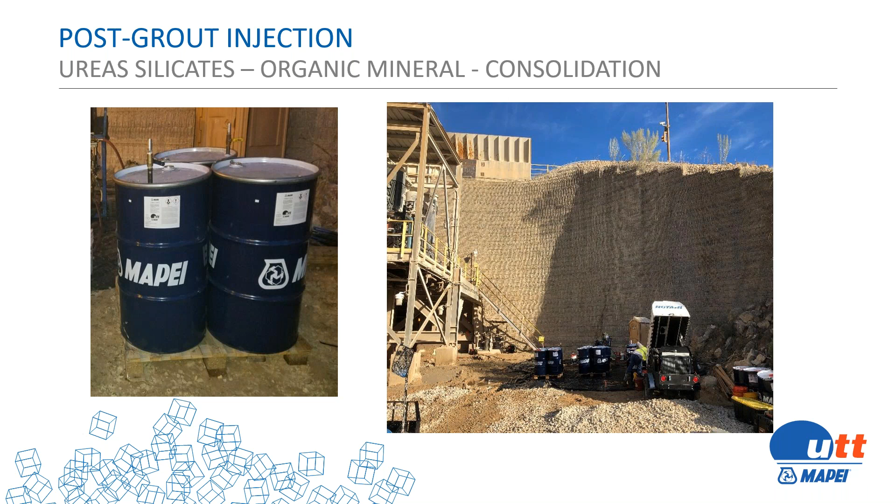So I can do joints, grout curtains, and fine cracks with this material. What we like about it is everything washes up with soap and water—the equipment washes up with soap and water, and the environment washes up with soap and water—yet the material is a true hydrophilic, meaning it can swell and re-swell because it's a physical reaction, not a chemical one.

A urethane is a chemical reaction—it goes from a liquid to a foam or a solid resin. An acrylate is more like if you had a glass of water and put salt in it and mixed it up, you couldn't see the salt crystals. If you took all the water out, you'd see the salt crystals again. So it's a physical reaction, and it can swell and re-swell.

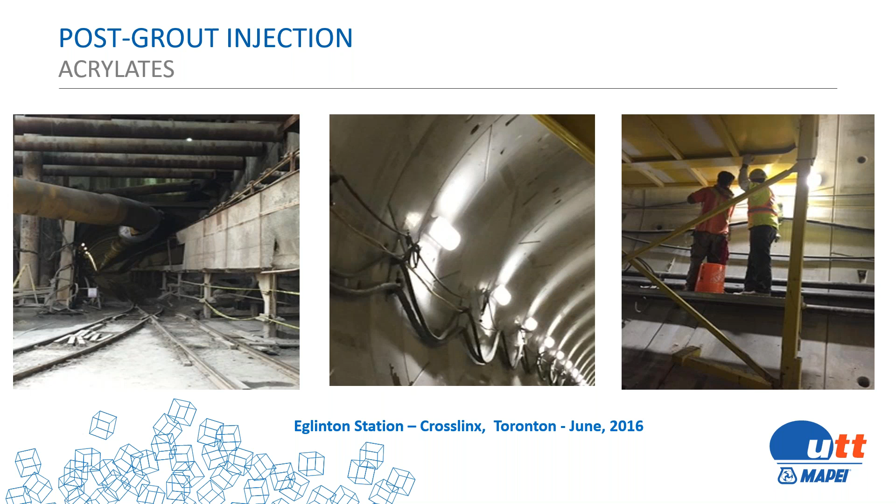We have jobs done underground that have lasted 25 years. Here's another acrylate injection we did in Toronto, the Eglinton station. Behind these precast segments, there are often little hairline cracks, and they also leak at the joints. This is a great material for post-injection after the precast segments are set in place, when the contractor needs to stop water coming in.

So we have complete solutions, and I'm going to turn it back over to Ramon. Ramon, would you like to go over our complete family? Thank you, Monica.

As we see today, we have a different type of product range that can meet every project—and every project is a unique and special project. So we have a proven product line for tunneling, mining, and underground structures, starting from admixture, accelerator, injection material, to waterproofing material.

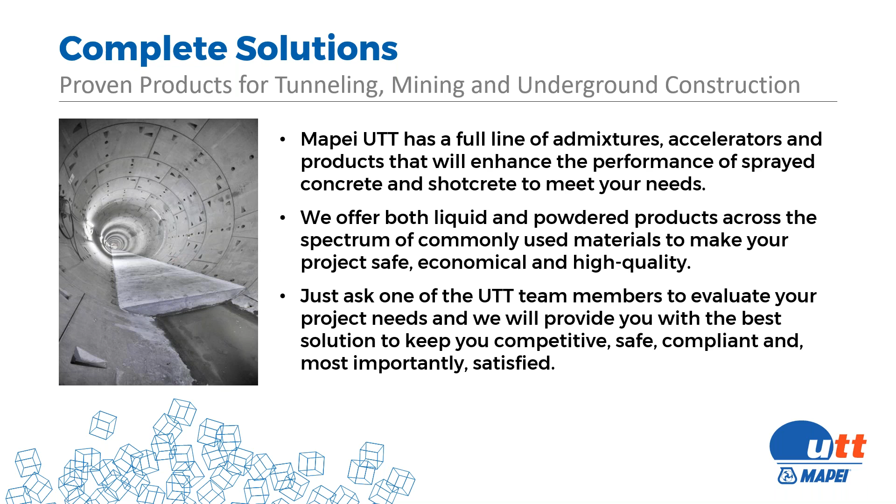So how can Mapei support you? If you have a new project in the works, we are very happy to give a quotation. During construction, we usually support the project with a lot of site visits. Also our TBM admixture team is ready for lab testing—whether you need lab testing for injection material, concrete admixture, TBM product, or soil conditioning, we are very happy to give you full support.

We also work a lot with designers and engineers on specification. Mapei can support by giving a specification and working on detail, including very specific details for difficult work environments. As I mentioned, tunneling is usually very deep with too much exposure—we're working in too hot or too cold conditions most of the time, and in wet conditions. We are very happy to provide the right solution for that.

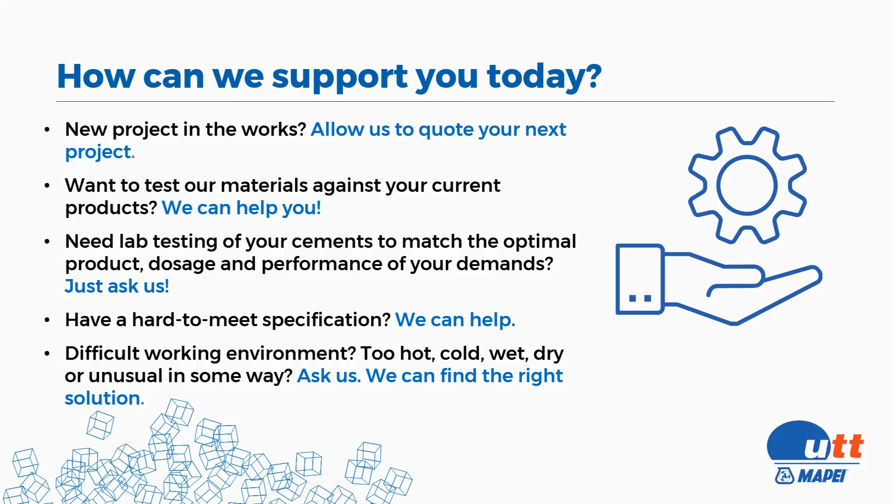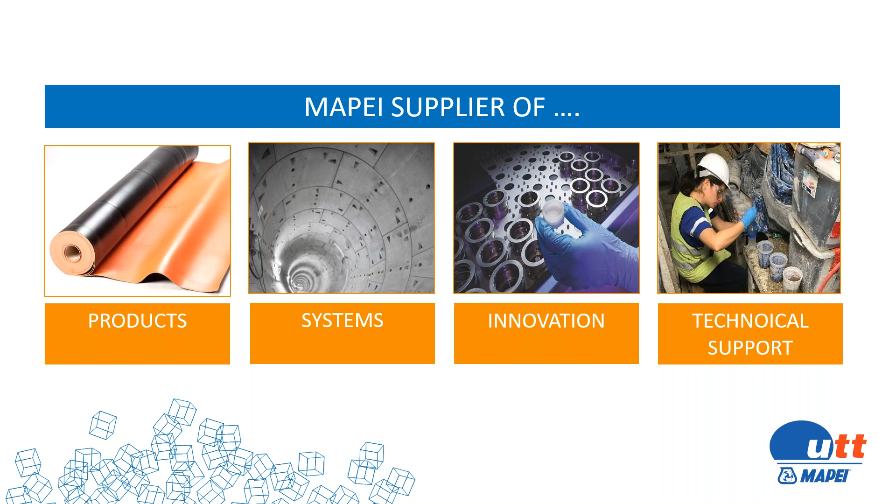We don't supply only product—we supply product, a full system, and innovation, and most importantly, technical support. We provide technical support, as you can see in this picture, with our PhD specialists testing and soil conditioning material, giving full technical support on site. Thank you, and if you have any questions, we're very happy to answer them.